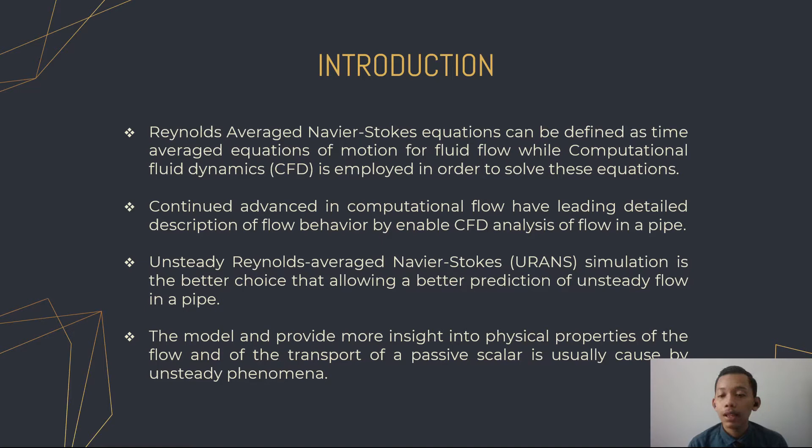Unsteady Reynolds-averaged Navier-Stokes or URANS simulation is the better choice, allowing a better prediction of unsteady flow in a pipe. The model provides more insight into the physical properties of the flow and of the transport of a passive scalar, which is usually caused by unsteady phenomena.

Next is the problem statement. There is only limited research about the flow in a pipe. The most common approach applied to see the flow structure in a pipe is the steady RANS approach, but there are only several unsteady RANS studies regarding the flow in a pipe. That's why I decided to make this study. The shape of the pipe plays an important role in the flow structure.

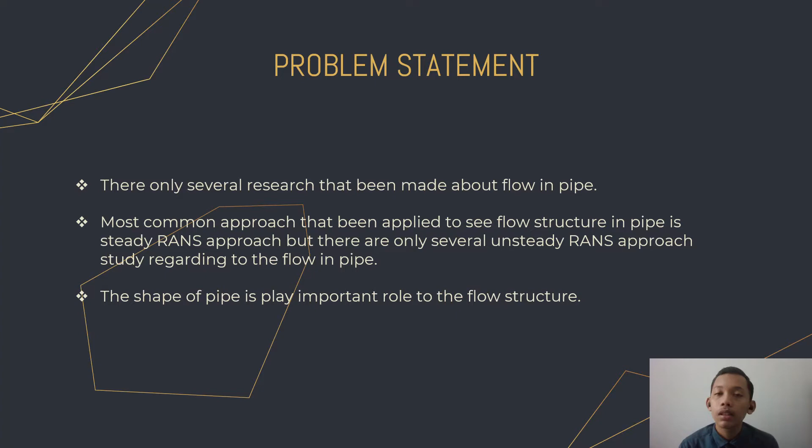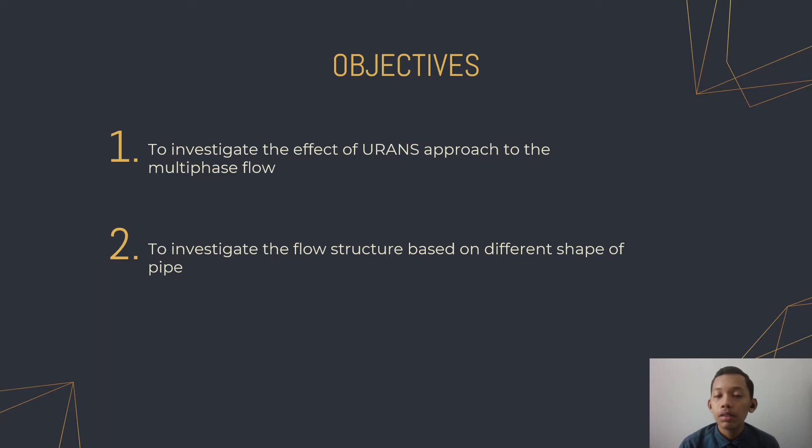The next part is the objective. The objectives I target to achieve are, first, to investigate the effect of the URANS approach on multi-phase flow. Second, to investigate the flow structure based on the different shapes of pipe.

Then is the literature review. There are several articles found regarding the URANS approach. First, in year 2013, authored by A. Kourta and friends, the title is Improved Unsteady RANS Model Applied to Jet Transverse to a Pipe Flow. The improved URANS approach is applied because RANS turbulence models using linear turbulent viscosity models are well known to be dissipative, and without caution unsteadiness it can be damped. This model allows unsteadiness to develop.

The K epsilon and KL approaches were implemented in the standard RANS and improved URANS of the flow. Both URANS K epsilon and KL models predict unsteady flow after considering the unsteady mechanism and vortex shedding adapted to the numerical scheme.

The second article, in 2018 by Andrea De Santis and Afaque Shams, is titled Assessment of Different URANS Models for the Prediction of the Unsteady Thermal Mixing in a T-junction. The prediction of unsteady flow is made using different low Reynolds turbulence models, while high Reynolds number models were applied for calculation of the T-junction thermal field in the well-resolved URANS configuration. The K epsilon approach was applied in this research.

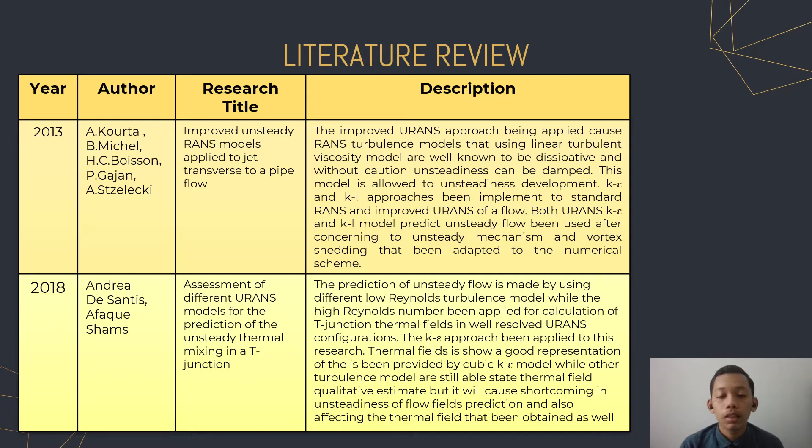A good representation of the thermal field is provided by the cubic K epsilon model, while the other turbulence models are still able to give a qualitative estimate of the thermal field, but with shortcomings in the unsteady flow field prediction, also affecting the thermal field obtained.

The next article, in 2020 by Wang Han, Wang Shunqi, Lu Daogang, is titled Turbulent Flow of Water in a 3x3 Rod Bundle: Numerical Results from RANS, URANS and LES Approaches. For the RANS and URANS methodology, a time-averaged part plus a fluctuation part compose the variable. In the RANS simulation, the residuals were set to 1 times 10 to the power of negative 5 to get a fully converged solution, while in the URANS simulation, the time step was 5 times 10 to the power of negative 4 seconds, giving a high Courant number of 0.6.

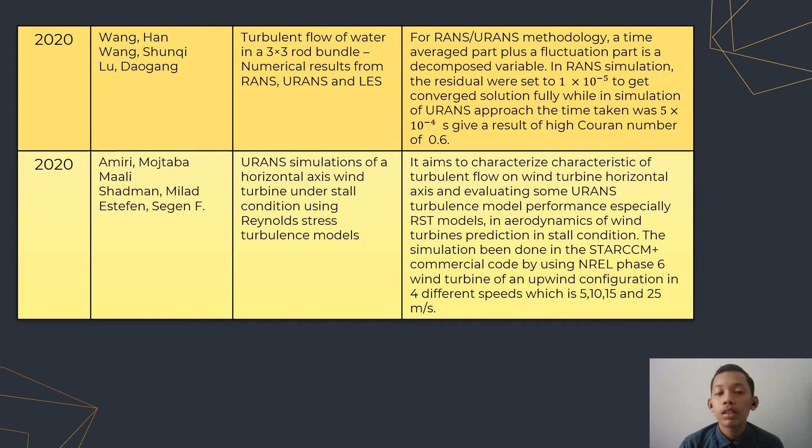The last article I found is from 2020 by Amiri Mojtaba Maali, Shadman Milad, Estefen Segen F. The title is URANS simulation of a horizontal axis wind turbine under stall condition using the Reynolds stress turbulence model. Its aim is to characterize turbulent flow on the horizontal axis wind turbine and evaluate some URANS turbulence models' performance, especially the RST model, in wind turbine aerodynamic prediction in the stall condition.

The simulation was done using the STAR-CCM+ commercial code with the NREL Phase 6 wind turbine in an upwind configuration at 4 different speeds, which are 5, 10, 15 and 25 meters per second.

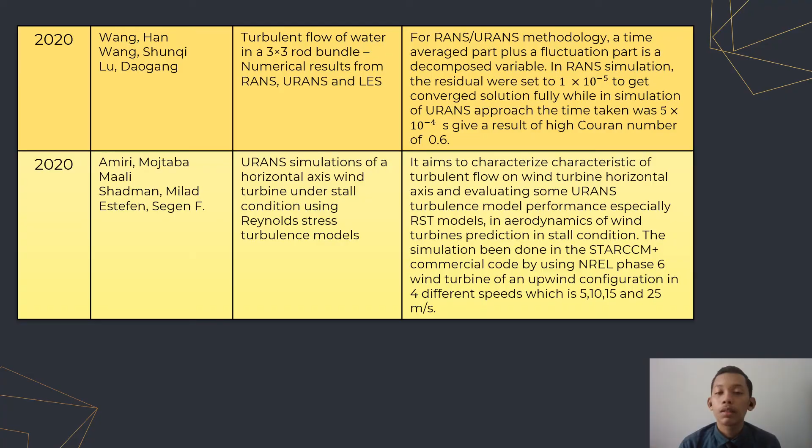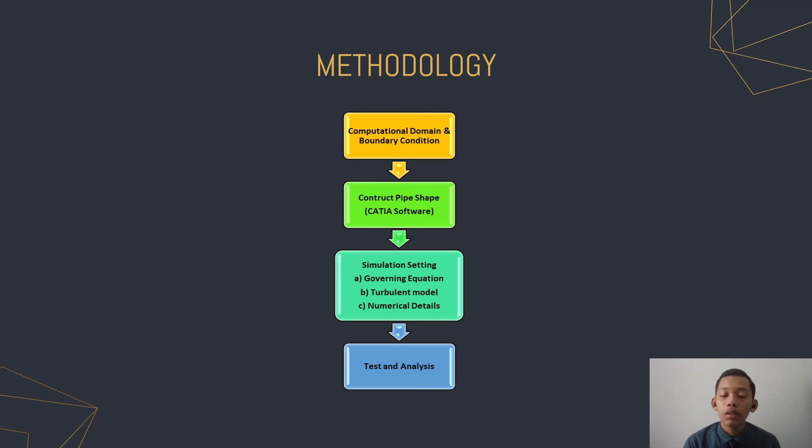After that is methodology. This is the flowchart used in my study. First, set the computational domain and boundary conditions. Then construct the pipe shape using CATIA software. Then set the simulation settings: first provide the governing equation, set the turbulence model, and set the numerical details using OpenFOAM software. And lastly is testing and analysis.

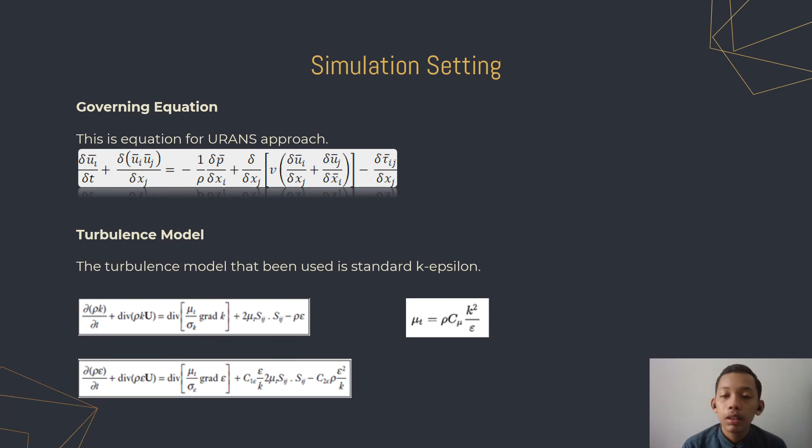Simulation setting. First is the governing equation. The governing equation used in this study is the URANS approach equation. Below shows the URANS approach equation. Next is the turbulence model. In this study, the turbulence model used is the standard K epsilon turbulence model. Below is the equation of the standard K epsilon turbulence model.

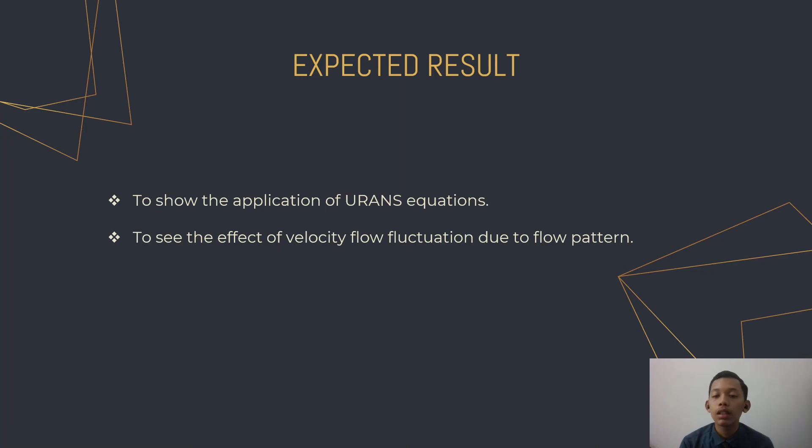For the expected result, I target to show the application of the URANS equation and also to see the effect of velocity flow fluctuation due to the flow pattern.